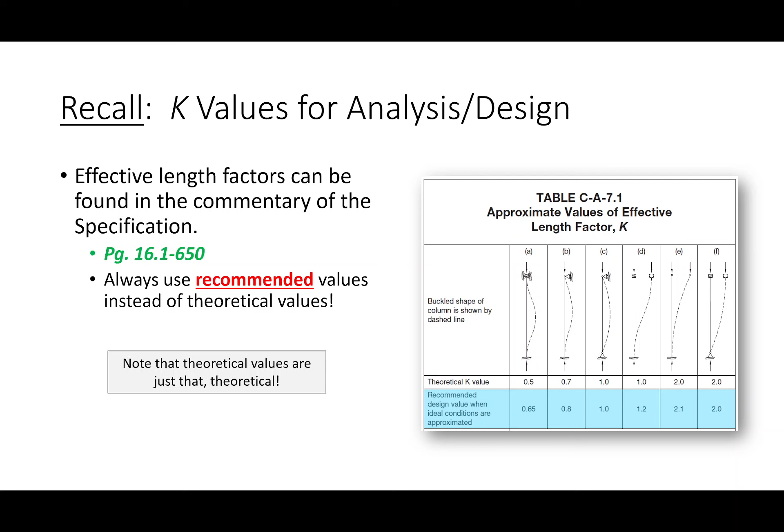Now, if you recall, we have two methods for analyzing a column. The first method is to just do the math, using section E3. When we're doing the math directly, we're trying to determine the governing slenderness, not the governing KL. The governing slenderness, the governing KL over R, is the KL over R that's the longest, the largest. So we determine the largest KL over R, and then using that, we compute an elastic buckling stress, and then a nominal buckling stress using our column curve equation, and then 0.9 times that times AG to get the capacity.

I would say everybody probably agrees that step one is probably the hardest. If you can get that, the rest is just plug and chug.

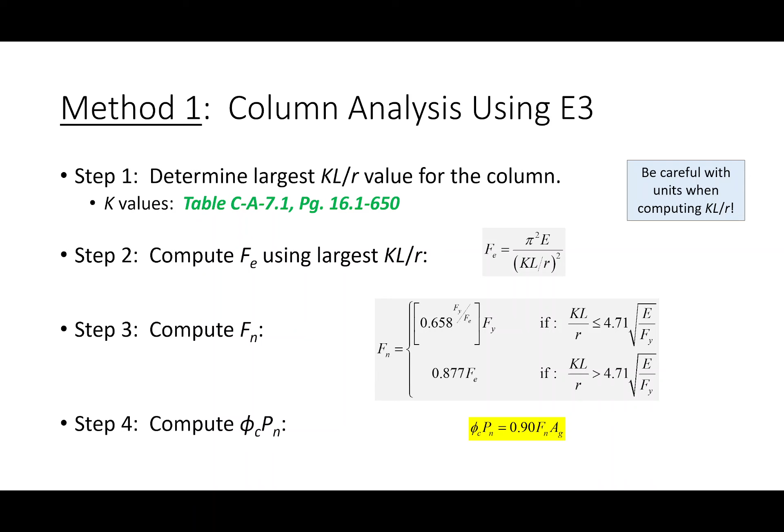Method two is to use our design aid. Now these are analysis methods. With the design aid, we're not trying to determine the governing slenderness, we're trying to determine the governing KL, okay? So the way that works is we're basically determining the largest of either KLY or KL effective.

Now the way we do that is we look at KLX and we look at KLY. If KLY is bigger than KLX, there's no need to compute a KL effective. You know the weak axis is going to govern. Just look up a section and/or look up the capacity, and there you go.

But if KLX is bigger, you can't compare KLX and KLY directly. It's comparing apples and oranges. To compare apples to apples, we need to adjust this KLX into an effective KL. The way we do that is we take KLX and divide it by that RX over RY ratio. So we have a KLY and a KL effective, and we take the largest of those.

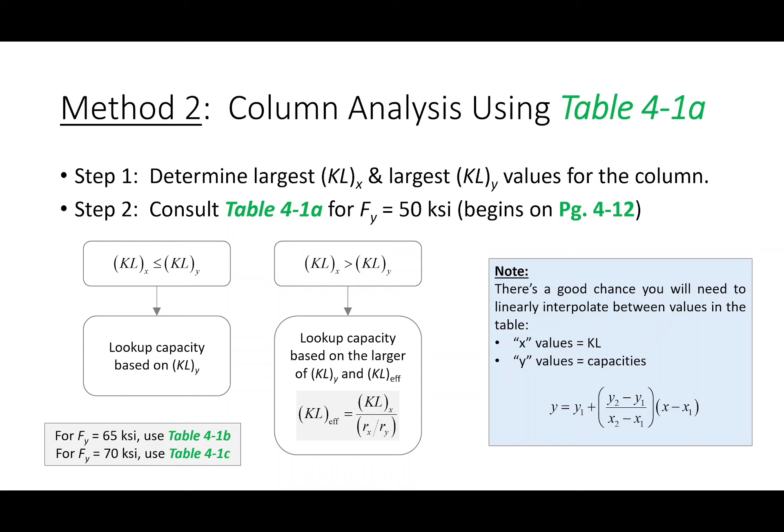Now, when you look things up in table 4.1, chances are you're not going to be looking up pretty values like a KL of 14 feet. You're going to be looking up a KL of 14.623 feet, so you have to interpolate. More often than not, you have to do that.

Now this is great for analysis, but for design, which is ultimately what we're really after near the end of this topic, let's go through that.

So to design a column, we determine our factored load, we determine the largest of KLX and KLY for the column, but we look up trial sections based off KLY.

Now remember, for trial sections, what we're doing is we're trying to find at least one W14, one W12, one W10, one W8. For some of those, it may not be possible to find one, and in today's example, that is in fact the case. But basically all that means is that sometimes you've got some really big loads and maybe a W8 just doesn't work. You'll see what I mean today.

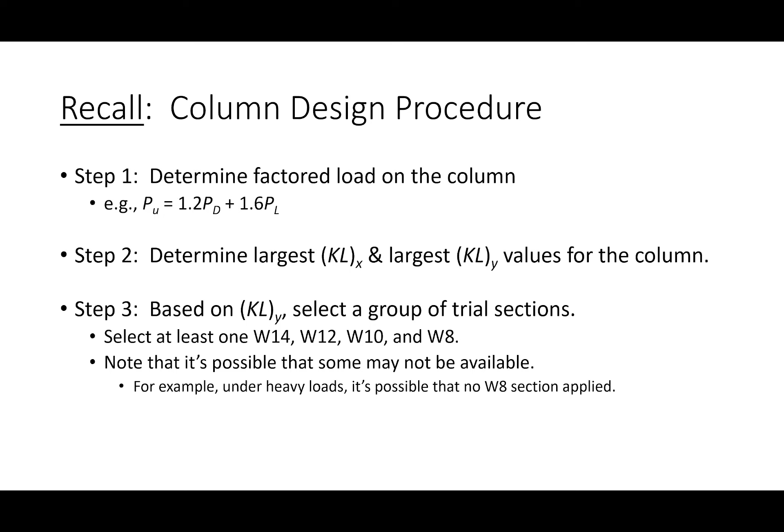Now I say that these are trial sections, especially if you have a situation where the strong axis governs, because you need to validate each one of those sections.

Now if KLY is bigger than KLX, there's no need to validate it because you know the weak axis governs. You looked the section up based on the weak axis, so you know they work, so just pick the lightest one.

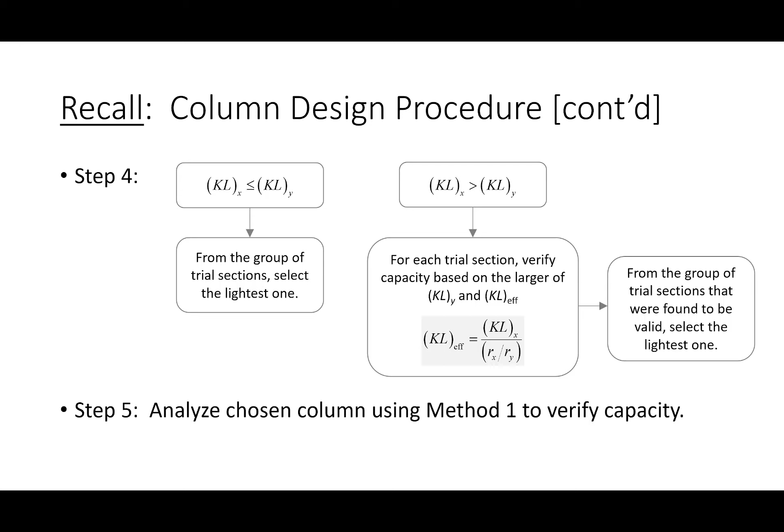But if KLX is bigger, you've got a little bit more work to do. And if this step was a little confusing, maybe today it won't be. I think this is the day that really ties everything together, and you really need to put your thinking cap on in terms of understanding how columns behave. We're going to make a lot of inferences and use a lot of critical thinking in our design process. So to explain that, let's just go through a problem.

Let me pull this up on the notebook. There's my sound effects again.

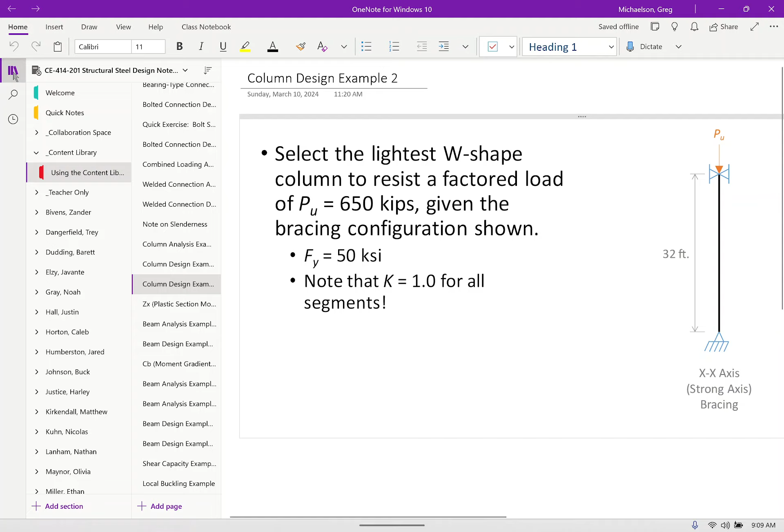Okay, so this is going to be our problem for the day. We're going to be looking at a column here that's 32 feet long. Now it's 32 feet long, but along the weak direction, or the weak axis, it is braced. There is a brace in the middle.

Now I know everybody brought their AISC 16th edition steel construction manual, right? Everybody brought it? That's not the 16th edition. There's the 16th edition.

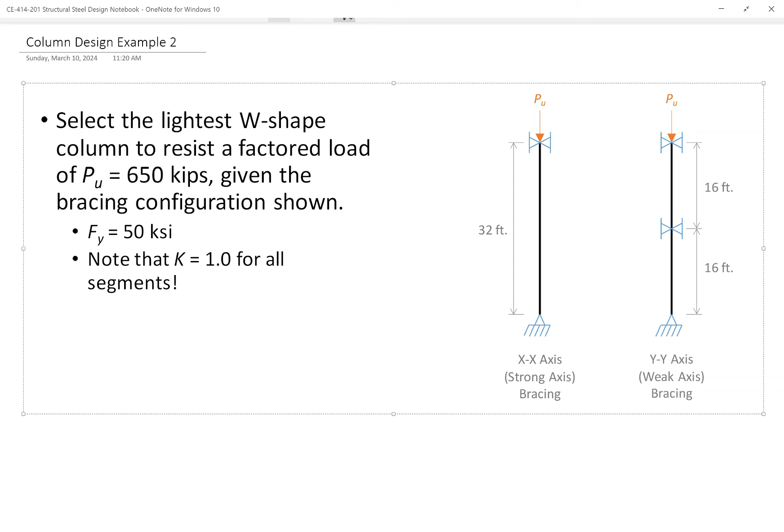Okay, you are going to need it today. Now, as I said, K is 1.0 for all these segments. If you look, every segment here is pinned in either direction. So K is 1 for every segment. That part's going to be easy.

Now, what we're going to do is select the lightest W shape possible to resist a factored load of 650 kips. So I kind of wanted to get to the meat of this example.

We're not even going to have to worry about factoring the load. I mean, step one is to determine the factored load, but we know that PU is 650 kips from the problem statement, so we can sort of move past that.

Okay, so what I want to do is determine the appropriate column to resist these loads. Now let's follow our process verbatim for now, and let's see if we can discern how we need to go about this.

So in order to design a column, we need its load, but we also need the KL values.

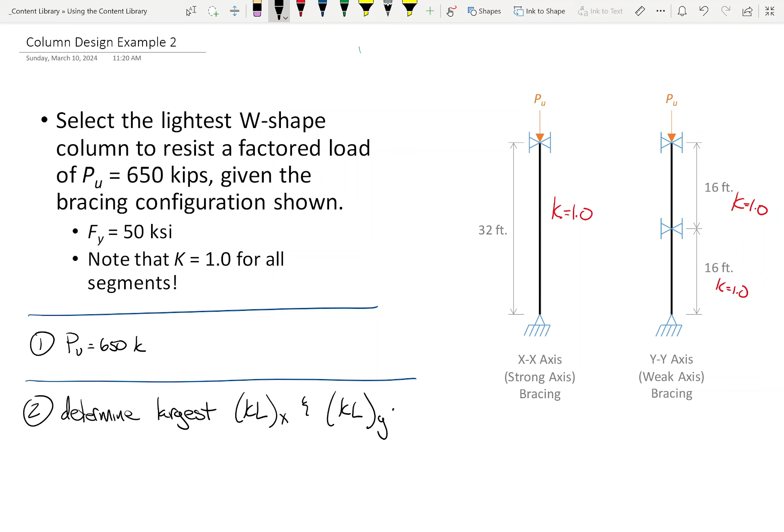Let's determine the largest KLX and the largest KLY. Now for this column, I think it's pretty easy. KLX is going to be what? 32 feet. And KLY is going to be...

16 feet. Now to be clear, this is a really realistic bracing scenario, this is what you would do in the real world. If I have a 32-foot column and I want to make it stronger, I need to brace it. But which direction? I'm going to brace it about the weak axis, not the strong axis, because if I press that column it's going to buckle about the weak axis. So placing a brace right here in the middle along the weak axis is what you would do to make the column stronger. You would brace it about the weak axis.

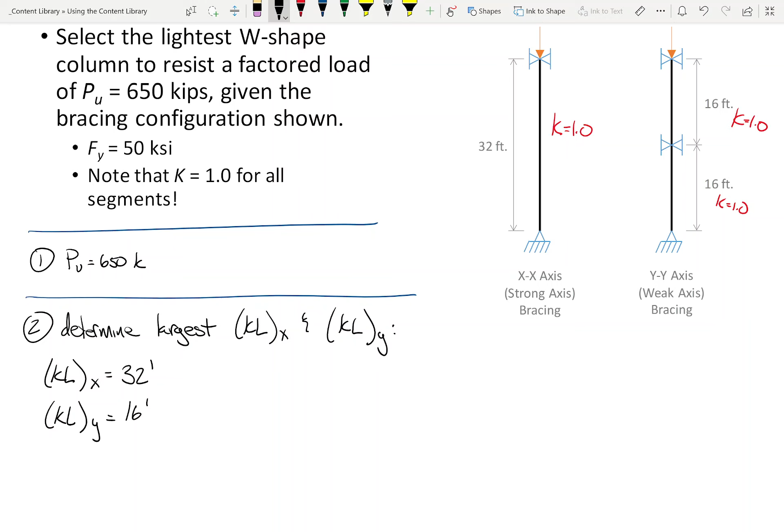I didn't want this part to be complicated with this example. I want to get to the actual process of design, so let's get into this. The first thing we need to do from a design standpoint is select some trial shapes.

Now remember, we're using table 4.1 to select trial shapes. Table 4.1 is written based off the y-axis, so we're going to be selecting trial shapes based off a load of 650 kips and a length of 16 feet, because that is the length along the weak axis. Table 4.1 lists the capacity with respect to buckling about the weak axis. This is how long the column's effective length is in the weak axis, so this is what matters in terms of selecting a column.

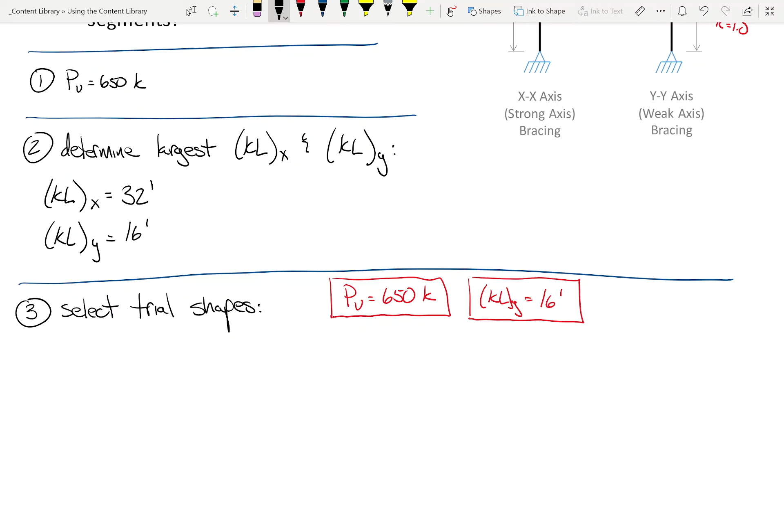So we need to select trial shapes. I'm actually going to number these. Let's number these. We'll letter them, how about that.

So we need to select the W14. Remember how we do this? We select a W14, a W12, a W10, a W8. So everybody's got their AISC 16th edition steel construction manual, right? So help me out, we're going to go to table 4.1a.

And we're going to find the lightest W14 that we can, at an effective length of 16 feet, that can resist 650 kips. What's the lightest W14 shape that you can find? 82. Is anybody else seeing that? I'm seeing a few people say that. So a W14 by 82.

Now you selected that because it has a capacity of what? Let's go ahead and write that down: 697. All right, because if you go to the next lightest shape, it's too low, right?

Now before we move away from the W14, I want to also record the Rx over Ry ratio. Let's go ahead and write that down, we're going to need it here in a second. What is the Rx over Ry ratio for this one? 2.44.

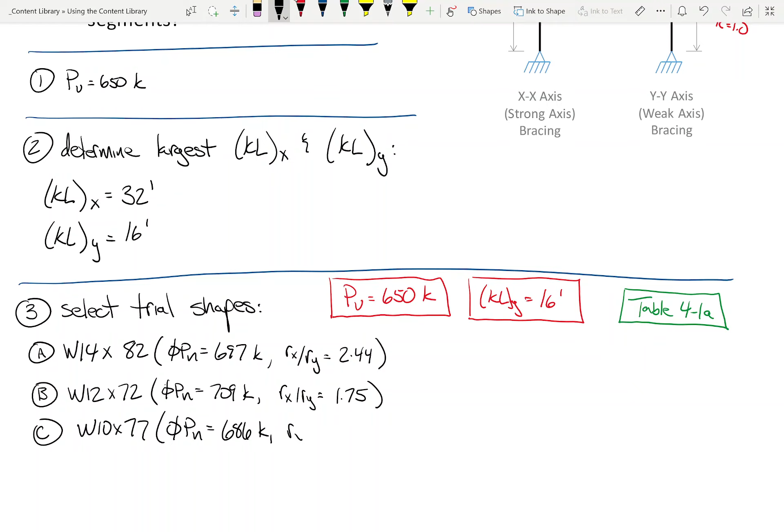I'm going to scroll up a little bit. 1.73, okay.

Yeah, and at 16 feet, what is its capacity? 487, right? So the heaviest W8 available just isn't enough, right? So we'll say no W8s

available, okay? And let's just put some context here. Remind me, if I have a W10 by 77, what does the 10 mean? What is the 10? The depth, right?

Okay, a W8 is about that deep, and it's supposed to hold up 650,000 pounds, and it's 16 feet long. Like, you see what I mean? Just think about it. It's not unreasonable that a W8 isn't going to work, okay? That's a lot of load for a steel column about that deep. You know, that's really tiny. So don't think that's a problem if you can't find one. Just, you know, keep the context alive.

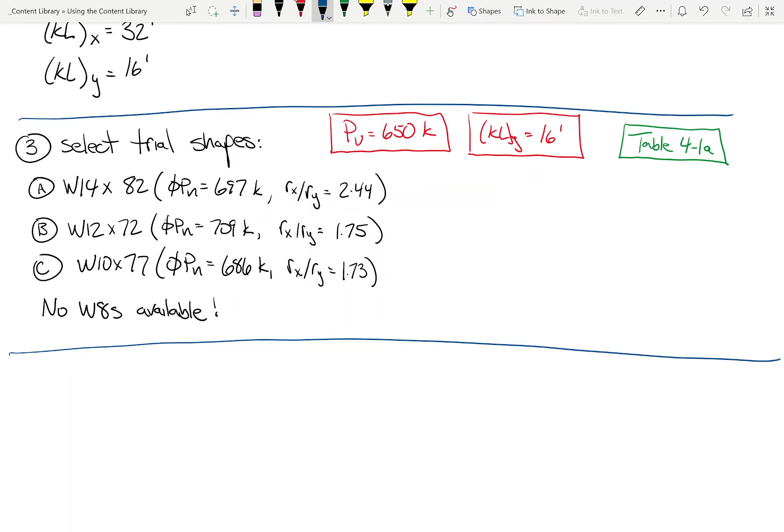Okay, all right, is everybody with me so far? Now, we did a problem like this before break, and the issue was the problem that we did before break, we had this situation. We had that KLY, so the problem we did before break, I think it was KLY was something like 14 feet and KLX was something like this. I think that feels right to me.

Okay? And the problem we did before break, if these were our governing values, I know that this governs. Okay? And if I know that the weak axis governs, what that means is I know that all these shapes work. So I'll just pick the lightest one, and of these, the 12 by 72 is the lightest. I'm done, right? That's not the case with this problem, okay?

With this problem, I've got that. So the question is, does the strong axis govern or does the weak axis govern? I don't know. In fact, it's possible that maybe for this one, the weak axis governs, and for this one, the strong axis governs, or vice versa, okay?

Whenever KLX is bigger, what that means is that we have to investigate the capacity of each of these trial sections, and that's what we're going to do.

Okay, now just so everybody's clear before we go into this problem, I am going to do this in order. Okay? I'm going to do section A, then I'm going to do section B, then I'm going to do section C. Okay? Then what we're going to do is we're going to go back and go, was doing it in order the right way? Did that make sense?

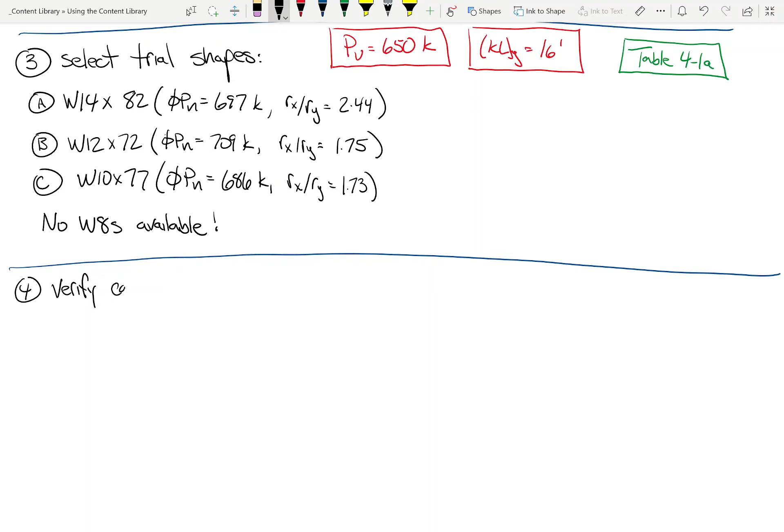And maybe it doesn't, okay? But I'm doing it in order because each of these are going to give us a unique viewpoint as to what can happen. So I'm just doing it in order for the sake of doing it in order. So let's just do each of these in order.

Let's start off with the W14 by 82. So while we're doing this, turn to the W14 by 82 because we're going to need to go back to that table. We're going to need some stuff. Okay?

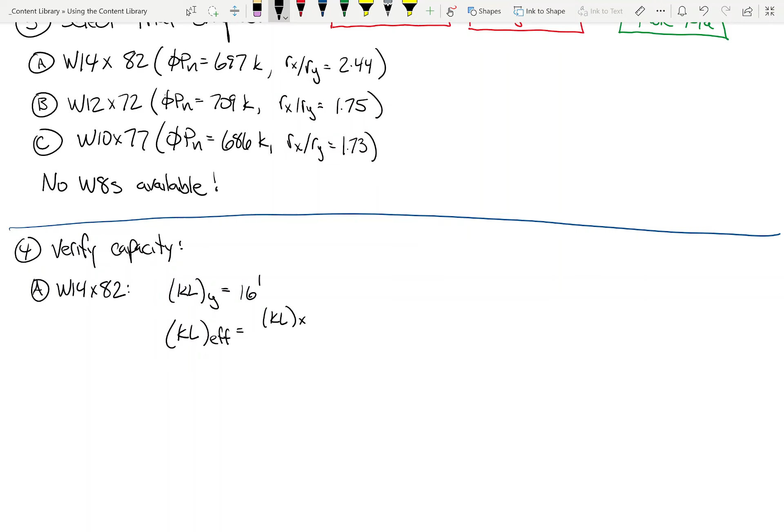All right, so for the W14 by 82, the KLY is 16 feet. What is KL effective? It's KLX over Rx over Ry. Okay? And what is that?

32 feet divided by what? 2.44? So, what is that? 13.11.

So, for this column, which axis governs? The weak axis or the strong axis?

Remember, when I say govern, what do I mean by that? I mean that if I have this column, right? So what governs its capacity? Remember, a column is governed by its slenderness, right?

The bigger the slenderness, the larger the slenderness value, the weaker the column, right? And so these are just normalized expressions of slenderness. So the longer these dimensions are, the weaker the column, right? So what governs its capacity?

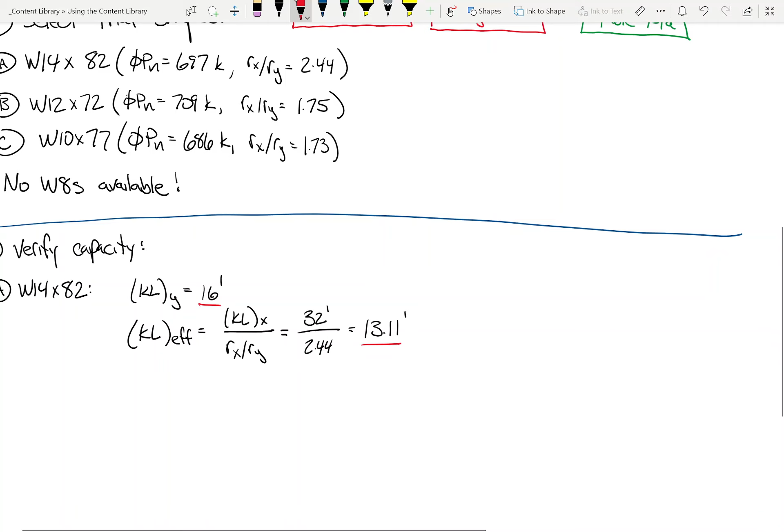Its weak axis or its strong axis? It's weak axis, right? Because it's longer in this direction than it is in this direction. So it's going to buckle this way first, right? That's what we mean when we say govern, right? So KLY

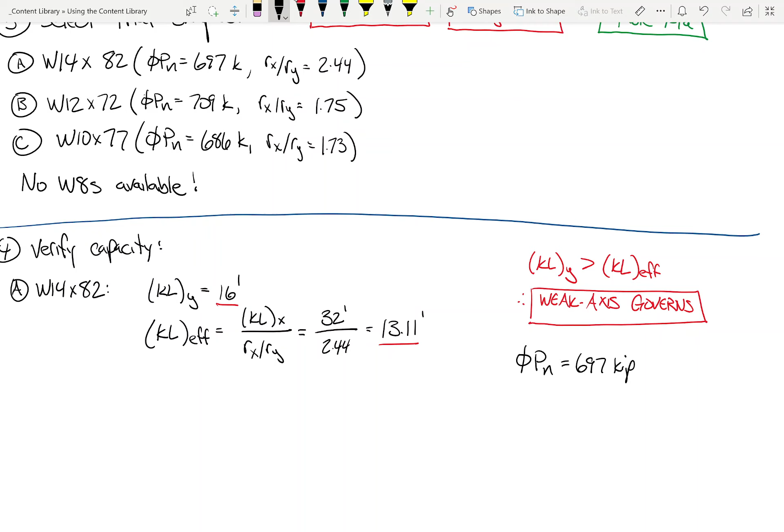is greater than KL effective, weak axis governs. And what I mean by that is if the weak axis governs, then what we looked up truly is the capacity. This table is written assuming that the weak axis governs. So I propose that the capacity of this column is in fact 697 kips.

So let's just ask a blunt, straight, basic question. If I were to use a W14 by 82 for this column, would it work?

Yes, it would. Okay, so I'm going to say that trial section A is adequate.

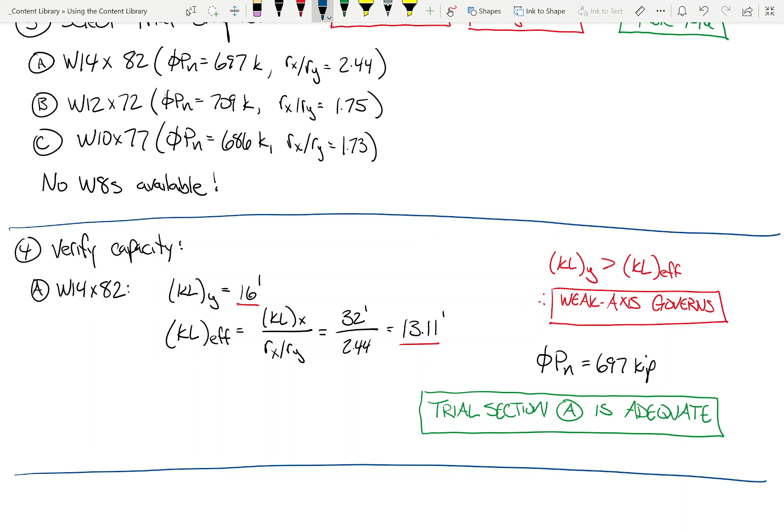That is an option. We could stop the problem right now, just use the W14 by 82 and go home. So a question for the class is, what benefit would there be in checking the W12 by 72?

Why even bother? Because it's lighter. That's exactly right. I might be able to get a lighter section, right? With me so far? So let's check the W12 by 72.

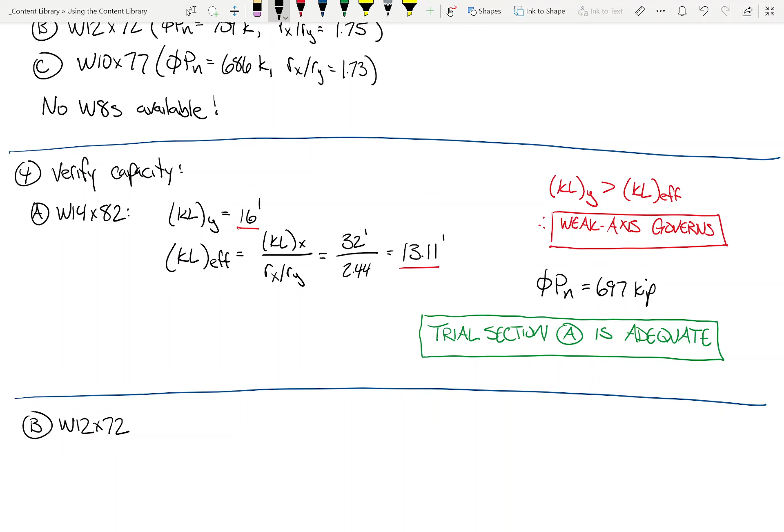Let's see what happens. So again, for the W12 by 72, we still have the KLY of 16 feet, but what about the KL effective?

What was the RX over RY for this? Say it again, 1.75? Okay, so what do we got here? 18.29, okay.

So tell me what's going on with this column. The strong axis governs. Okay, so what does that mean? Let's just write that down.

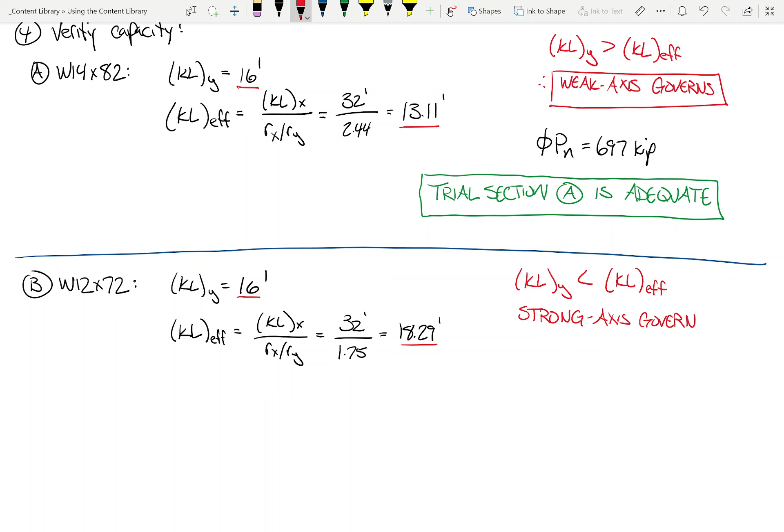What does that mean? Well, what did it mean up here, for section A? Section A, the weak axis governed. Okay, so what did I say after the weak axis governed? The weak axis governed, therefore the capacity is 697.

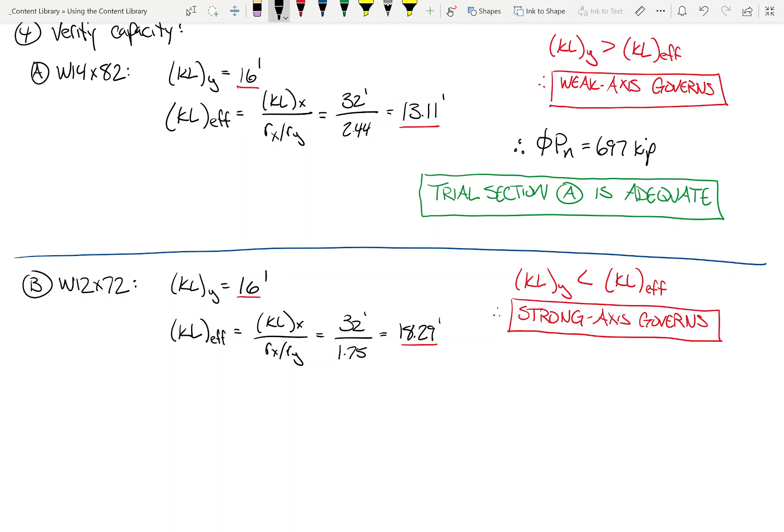So I just said that's the capacity. Why did I do that? Well, these trial sections were looked up based on the weak axis. So because for the W14 by 82, we found the weak axis governed, that is the capacity.

So I guess my question for the class, is this the capacity for the W12 by 72? No, it's not, that's wrong. That's what we mean when we say verify the trial sections. This is not the capacity of the 12 by 72.

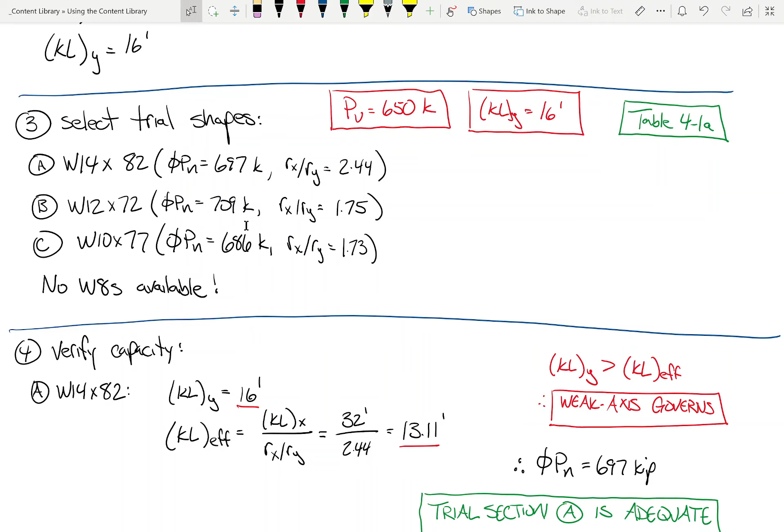So what is the capacity of the W12 by 72? Well, the capacity is based on this, so we need to look up the capacity based on 18.29 feet. Can we look up the capacity based on 18.29 feet? No, but we can look up 18 feet and 19 feet and interpolate.

So let's do that, okay? So what we're going to have is an 18-foot value, an 18.29 value, and a 19 value. So somebody help me out. What is the capacity for a KL of 18 feet?

656. Everybody else see that? What about 19 feet? 629.

So it needs to be somewhere in between there, right? And remind me, what was the load on this column? Like, what are we designing it for? So it needs to be somewhere in between. Seems like it's worthwhile to interpolate, doesn't it? Let's see what happens.

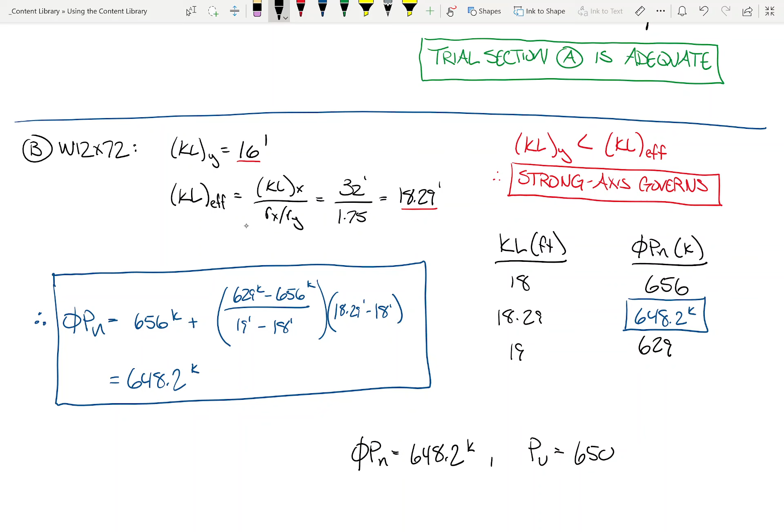All right, so we'll say that trial section B is inadequate. That one's not going to work.

So, could we stop right now? Well, you're saying no, why? W10 be lighter. Exactly, right? So, exactly what I was going to say. I mean, we have a section that works, we have the W14 by 82. But it's still worth it to check this next section because it's lighter, right?

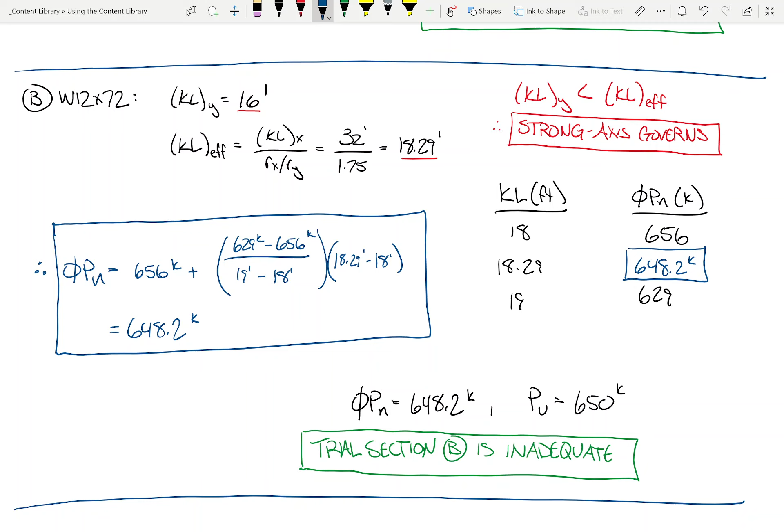Okay, and remember, you always do want to kind of keep your eye on the prize. The eye on the prize for this problem is this number right here. If we can get a capacity that's greater than or equal to that number, then we know the column works. Okay, so let's see this W12 by 77, let's see what happens.

So we do our KLY, we do our KL effective. I'm sorry, what was RX over RY for this? 1.73. Which is what? 18.50. Second?

All right, so observation, which axis governs? There we go.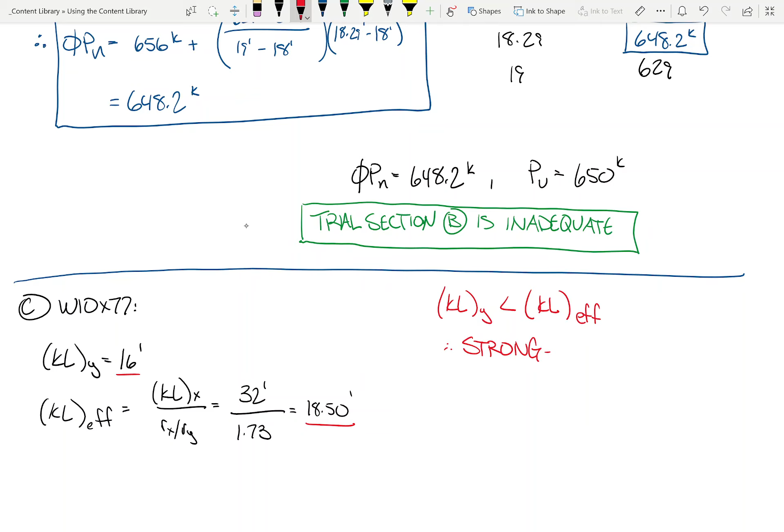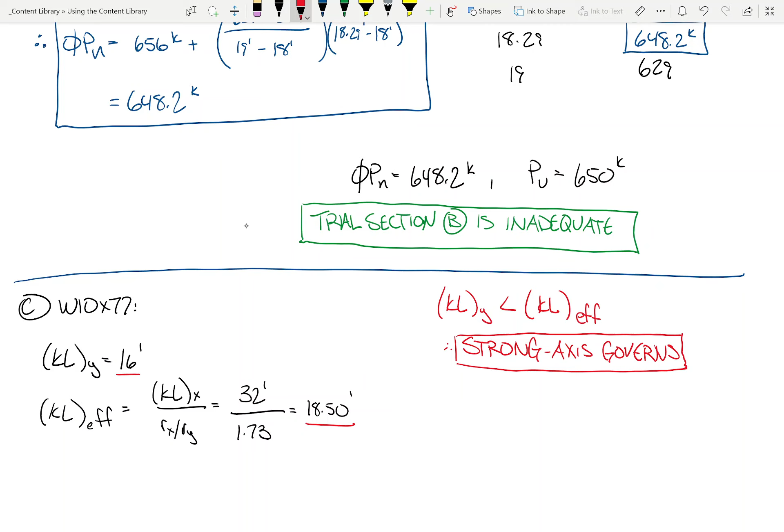Now first off, if we do the linear interpolation, it's going to be pretty easy. You just average it, right? So what do we get for 18 feet? 617. Okay, and what about for 19 feet?

Okay, and so we want to find the capacity in between, but anybody make an observation about what we got going on right here? It's not going to work, is it? It's already lower than 650. It doesn't matter. Exactly right. It doesn't matter, right? So is there any point in doing the interpolation? No.

Is this column going to work? No, it's not going to work because it doesn't matter what this value is. It's less than this. So I guess my question is, now do we have our answer? Yeah, we have our answer. The first section, the W14 by 82.

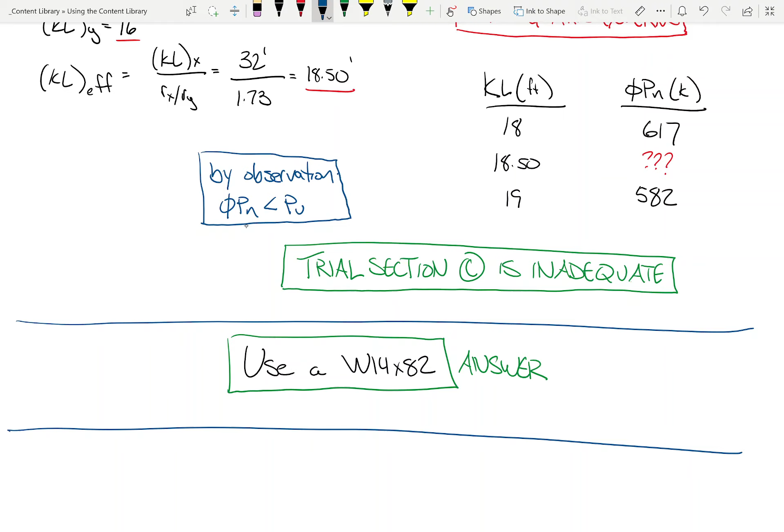Now personally, I don't believe that the problem is done, okay? Because I think after all this hullabaloo, it's worth it to just analyze the W14 by 82 and make sure that it works, okay? Especially with problems where you ended up selecting a section based off interpolation, where you've got multiple different iterations and trial shapes. Just analyze it and make sure that it works, okay? So we are going to analyze it, but before we do...

Here, I'll just set a trial section. We'll just say analyze W14 by 82. I mean, if you ask me, a column that's going to hold up 650,000 pounds is worth 3 minutes of calcs. I'm sorry, I think it is. Okay, so we're going to analyze it just to verify.

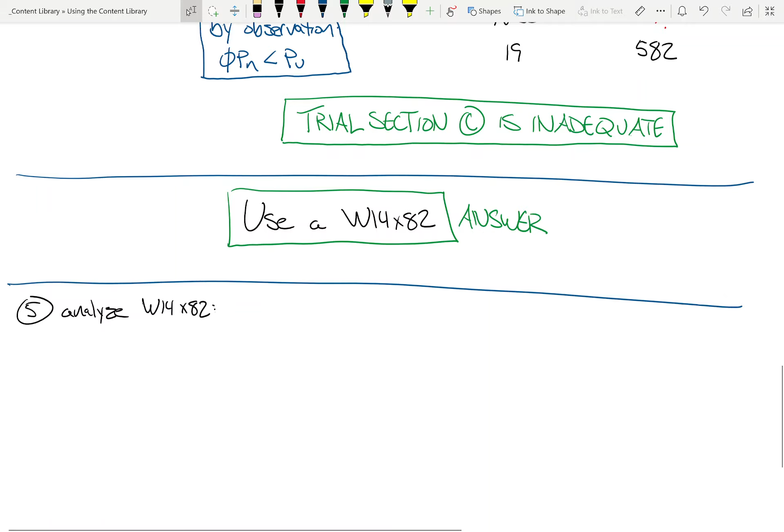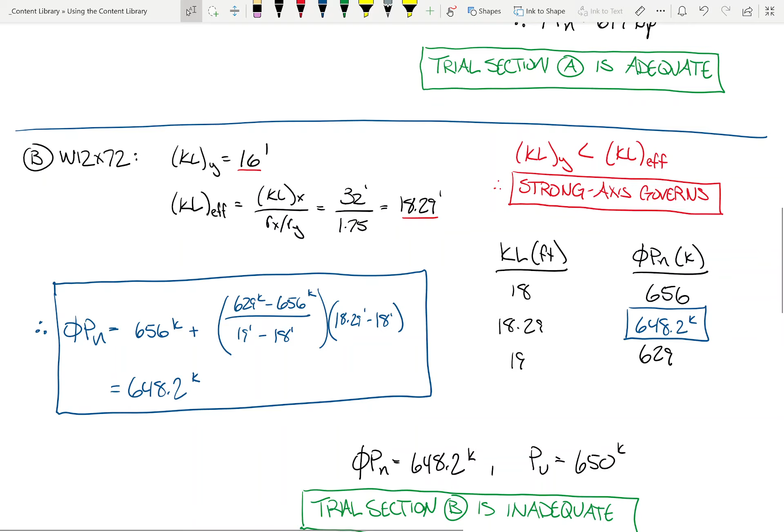But I do want to go back to some of our process here because, first off, I want to make sure that the process made sense. I want to make sure that you all have an understanding for when interpolation is a good idea versus here when interpolation really didn't make any sense, okay?

And to be clear, I have no problem if you get to a point where, okay, for example, we had this. So we had what, 617 and 582, and we'd said that the section does not work, right? But let me ask you a question. What if we had gotten this? What if that's what we had gotten? What could we say there?

We could say that the interpolation is not necessary because the section does work, right? Because no matter what, it's going to be bigger than this, and this is bigger than that, right? So that's fine too, okay? Make sense? Now here's another question.

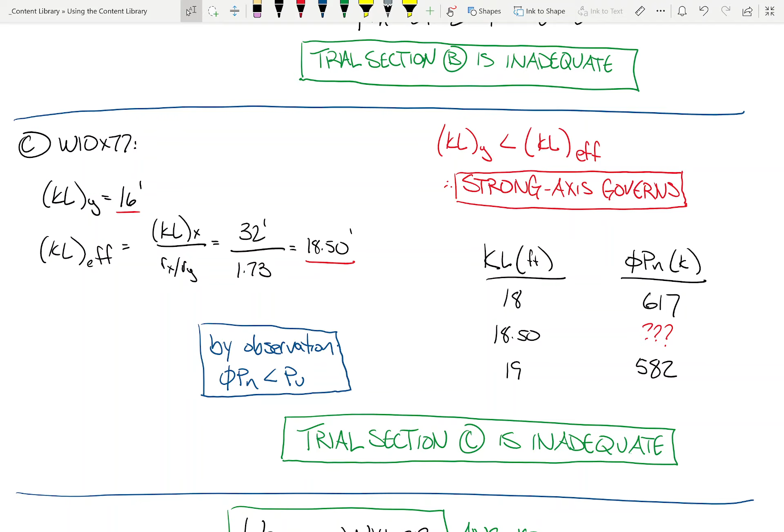Without going through all this math, what do you think might be the easiest way of doing these? What order? Do the lightest one first. So whenever you find one that works, stop. You see what I mean?

We didn't do that for this problem because I kind of wanted you to see all three different iterations. Although we could have done it in order, we would have seen all three. But what I'm saying is I have no problem if on an exam or on a homework assignment you do it in order, and if the first one works, you just stop. That's fine too. You don't have to do them all, right? The whole point is to select the lightest shape, okay? Now for this one, it happened to be the first one. You don't really know that going into it, right? There's too much going on. That's why we have Table 4-1a, okay?

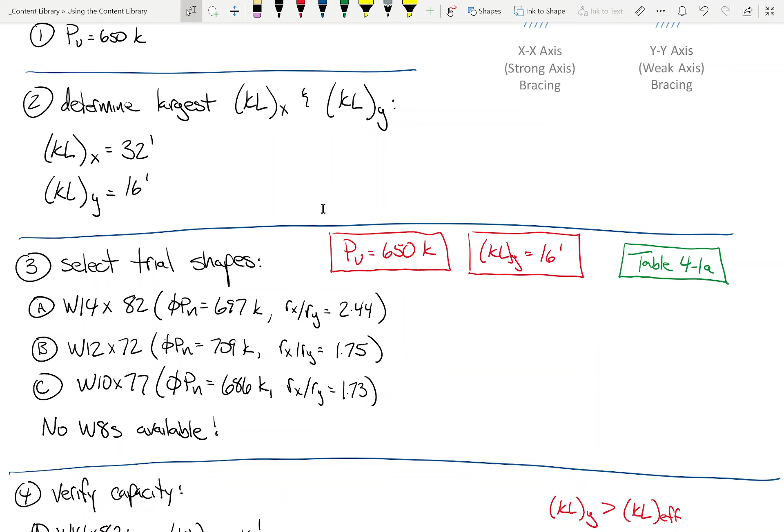Does that make sense? Now again, I think that this is worth 3 more minutes of our time, or 5 more minutes of our time, if it's going to hold up 650,000 pounds. So let's analyze the W14 by 82. Now I'm going to help you out a little bit.

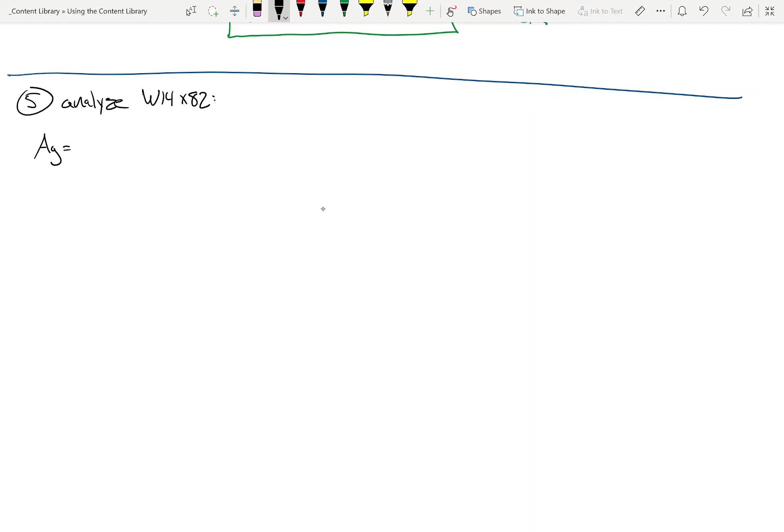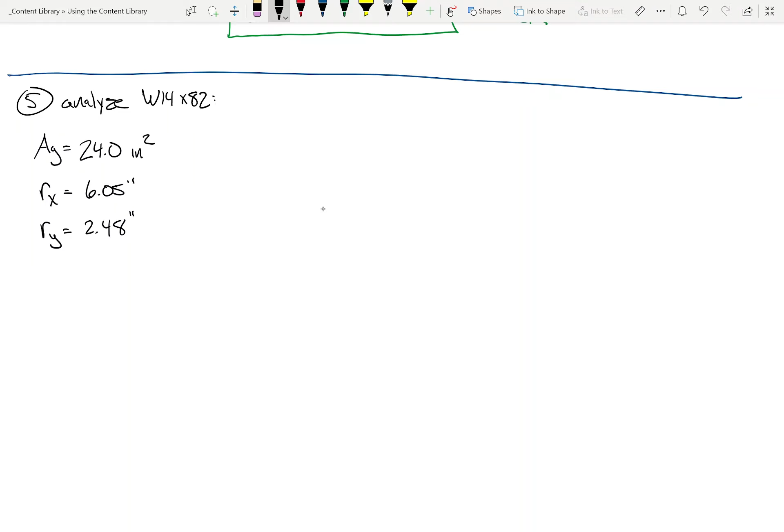Here's AG, RX, and RY for the W14 by 82. I'll just get these right from the very beginning of the manual, table 1-1. Now some of them are at the bottom, but not all of them, so I get into a habit of just looking them up directly from table 1-1.

Now remember, we do still have these. And I want to be clear, we're using KLX and KLY. We're not using KL effective here. KL effective is just a tool for using table 4-1. We're not using table 4-1. We're using the spec directly. So we can ignore all that KL effective junk.

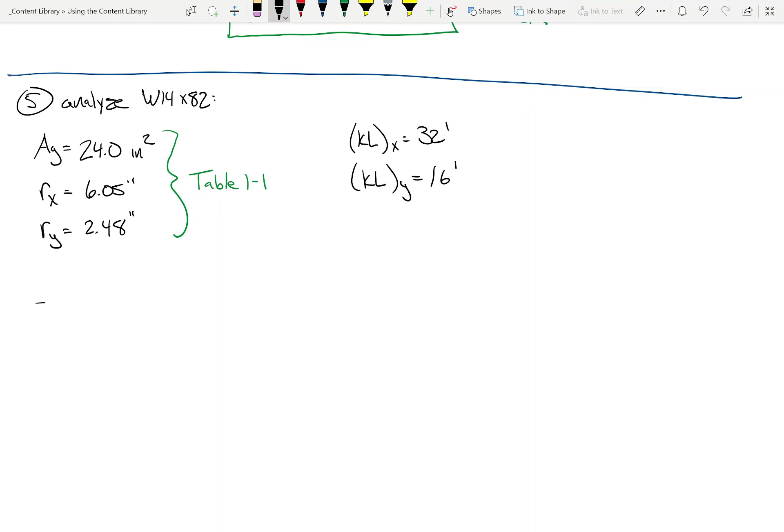So how are we going to handle this? The first thing we're going to do is compute a KL over R for each direction. So that's going to be 32 feet over 6.05 inches.

Am I missing something? What am I missing? There you go. You've got to convert this to inches so that it's inches over inches. Remember, slenderness is dimensionless, it has no dimensions. So we'll do the same thing here.

So somebody give me a KL over R for the X and KL over R for the Y. What's KL over R for the X-axis? 63.47. What about Y? 77.42. Make these sevens a little clearer.

So which axis governs? Weak or strong? What was that? No, these are slenderness quantities. The bigger the slenderness, the weaker the column. So we're trying to figure out worst case scenarios here.

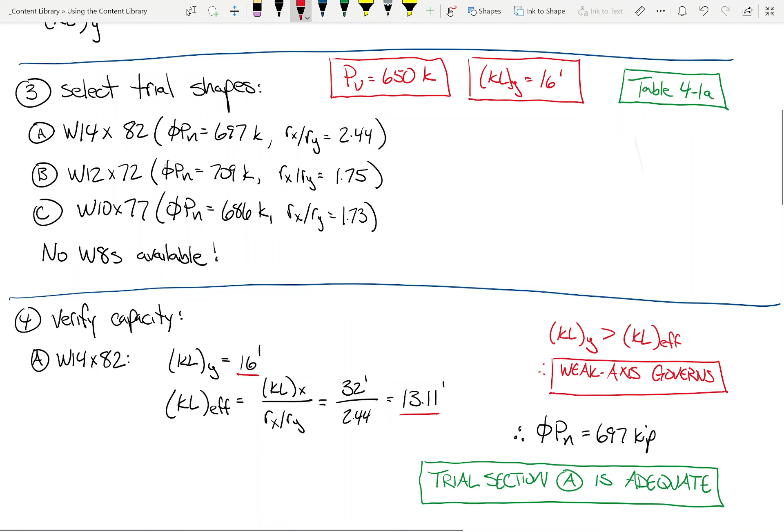Now does that gel with what we did before? When we analyzed the W14 by 82 up here, what did we find? We found that the weak axis governs. Down here, this is the weak axis.

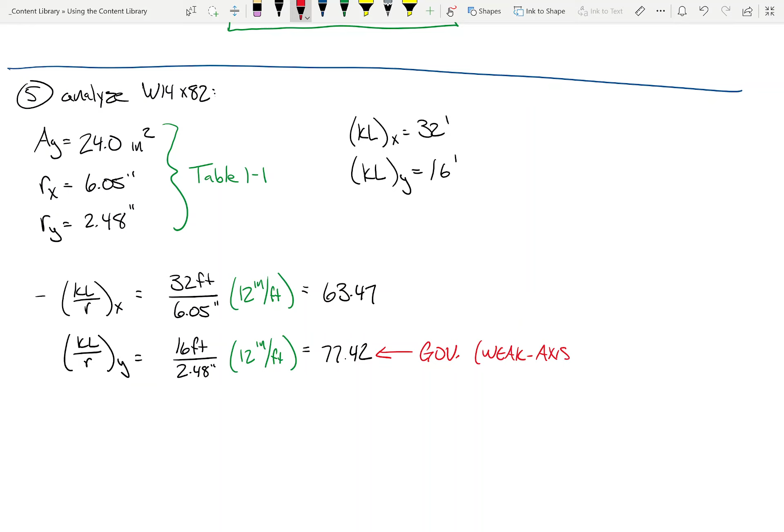So now what do we do? I've got the governing KL over R. What do I do with it? What's the next thing that I compute? What's Fn? But in order to get Fn, I'm missing a parameter: Fe.

What's E? There we go. It's like 29,000 ksi. I want that number just burned into the back of your head.

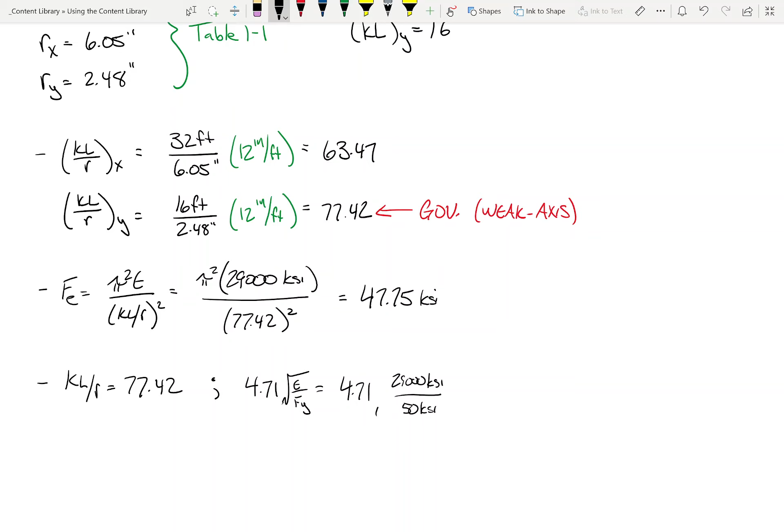KL over R is 77.42, and we compare that against what? 4.71, multiplied by the square root of E over Fy. And that one I'll give you, that comes out to be about 113.

So therefore, we calculate our nominal buckling stress as... we use the exponential term, which by the way, during design, if this isn't happening, you're probably doing something wrong. Just about every column that we design should be using this expression. I'm just throwing that out there. If you're not using it, chances are you're doing something wrong.

Because inelastic buckling allows the column to reach higher stresses, which is kind of what we want in design. We want to be able to use as little steel as possible. So if we're using as little steel as possible, the steel that we do use is probably going to see some pretty high stresses. So that's kind of why.

Remember, that's an exponent. So what do we get for that? Remember that fraction, it's an exponent, you're not multiplying by it. 32.26?

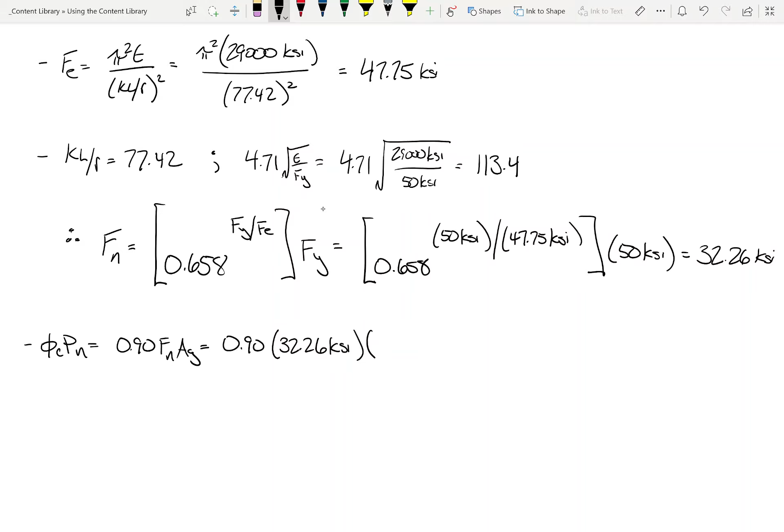Okay, and then AG was 24. Woo. Okay, hold on, I can do better than that.

Okay, and so what do we get for PN? So what does that mean? Is that good? That's good, right? And by the way, what did we get for PN from step 4? 697. And we just calculated 696.8. Just saying. So I'll just call it, capacity verified.

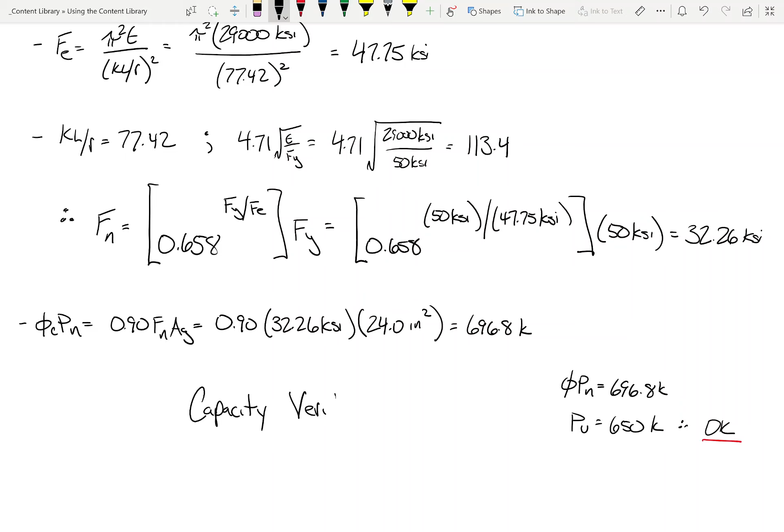And again, for a column that's holding up 650,000 pounds, I think it's worth 5 minutes. Make sense? All right, any questions on this?